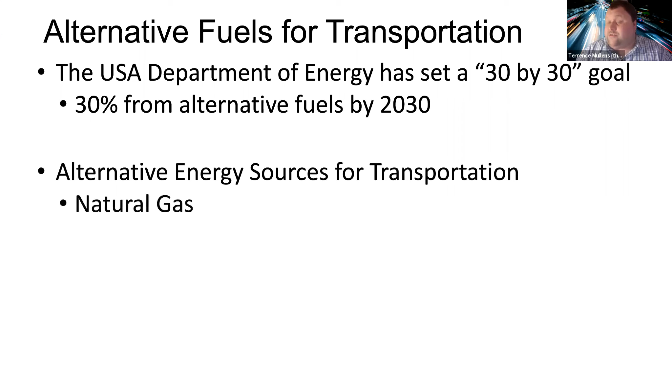Unfortunately, natural gas has that issue of fracking. Hydrogen power, believe it or not, hydrogen powered vehicles are becoming a thing now. The Toyota Mirai is a good example of that.

Electric vehicles, I can't let my friend Elon Musk down. I'm not friends with him. I kind of wish I was. I'd borrow some money from him.

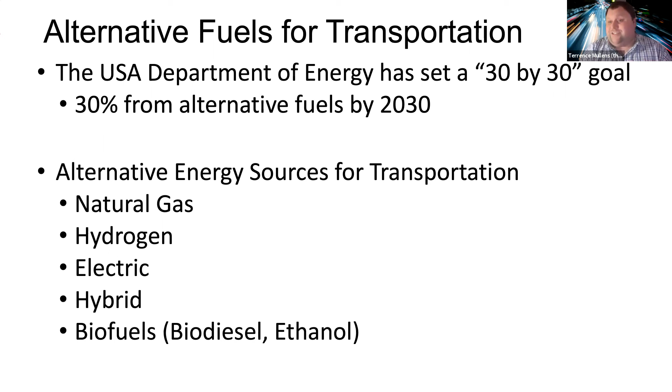Hybrid vehicles, like the one I drive. Biofuels are another potential alternative to petroleum powered vehicles, and biofuels actually have some pretty interesting implications to them. Let's briefly talk about some of these.

So many government vehicles, as well as many buses, actually run on natural gas. They'll have a little diamond on their chassis somewhere that says CNG. I think the C stands for compressed, and the NG stands for natural gas.

One of the benefits of natural gas is that it is a much cleaner burning gas than typical petroleum. Typical petroleum, in addition to carbon dioxide, shoots out a lot of other crap that we don't want, polluting our air, whereas natural gas is much cleaner burning, meaning the biggest byproduct you get is carbon dioxide.

The other benefit, as I've said before, is that burning natural gas and converting it to carbon dioxide is actually a better alternative than just letting it float away into our atmosphere, because natural gas, mostly made up of methane, has a much higher greenhouse potential, anywhere between 20 to 30 times, and depending on the time scale, even larger than that, compared to carbon dioxide.

So natural gas has been seen as an alternative. The problem, however, is that we are so reliant on natural gas for electricity generation that we've had to come up with very creative ways to get it, including fracking. And fracking has shown its share of problems.

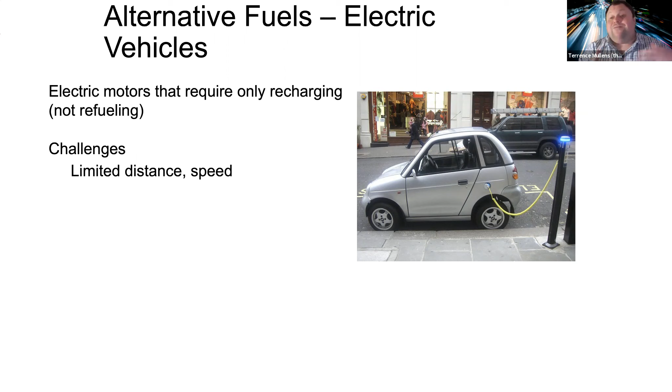And we're still at this place where recharging vehicles is not very time efficient. That's being worked on, but it's still an issue—the high recharge times. So you have to pull over and recharge, and unlike just pumping gas into your car, which takes 5 minutes, recharging may take 45 minutes, an hour, or even 2 hours. That's now time added to your trip.

Another big issue is the carbon footprint of batteries. There is a lot of emissions that go into simply mining, processing, and constructing the batteries. So this is actually another big issue. Even though maybe they use less direct energy, they use more indirect energy in the actual production of the battery.

On the other hand, there are actually some benefits. First off, they don't emit greenhouse gases directly. They don't release aerosols, so they're cleaner. They save consumer money on gasoline, since electricity is a lot cheaper than gasoline.

When you think about how much money it takes to power your home versus how much it would take to fuel your car, driving an electric vehicle would actually save you money in that area. That said, until we can get to a place where electric cars can drive farther, drive faster, and charge quicker, they're still kind of limited. And until the carbon footprint of mining the materials and producing the batteries is offset more than enough by the reduced carbon footprint of driving the thing, electric vehicles still have a little ways to go.

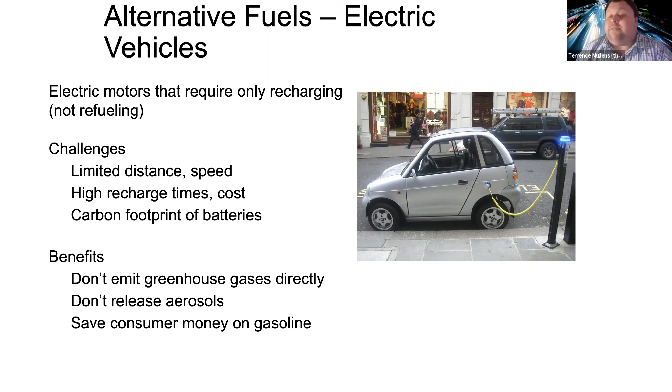Nevertheless, electric vehicles are becoming a bit more of a viable option, and pretty much every single major manufacturer does have some electric vehicles. Chevy had the Chevrolet Volt, Nissan had the Nissan Leaf, and of course we all know about Tesla. Tesla's sort of become the big motor company now. I think it's actually the most valuable car company in the entire world - don't hold me to that, but I'm pretty sure that's true, at least by stock value. So even Teslas have become a pretty viable alternative.

And then there are people like me who aren't quite ready to go with an electric vehicle, but instead really do want to stick a little bit with gas while also using some of the benefits of an electric vehicle. That is where hybrids come in. And really, the bee's knees of hybrids is the Toyota Prius. The Toyota Prius has really been the trendsetter for hybrid vehicles, and in fact, usually when people think about hybrid vehicles, they think about the Toyota Prius.

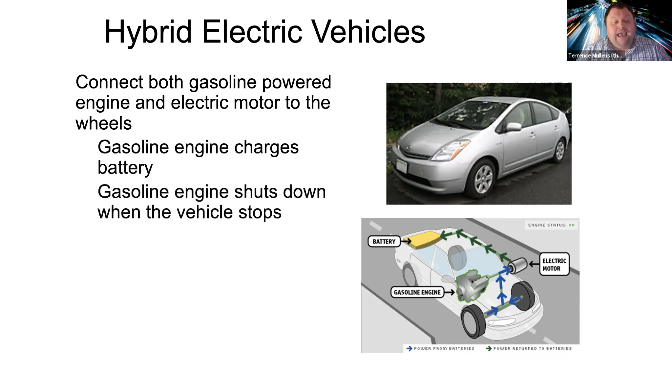Gasoline charges the battery, and when the vehicle stops or goes below a certain speed, the computer system inside the vehicle will actually turn off the gasoline engine and turn on the electric engine instead. There's also another process called regenerative braking, where as the car is slowing down and stopping, the braking mechanism also charges the battery.

Hybrids are much more fuel efficient, in some cases as high as 30% more fuel efficient than a traditional gas-powered vehicle. As I mentioned, I drive a Toyota Prius. I have driven the living heck out of that car - it just passed 160,000 miles at the making of this video, and I still get about 40 miles per gallon on it. When it was brand new, it was closer to 50 miles per gallon. So that's, to me, pretty good bang for my buck. I've been very pleased with it.

It's been having some issues with its ignition coils lately that I need to get fixed. Hopefully I can still get it on the road for another 80,000 miles, knock on wood. And then there's actually a hybrid that goes even another step further called a plug-in hybrid.

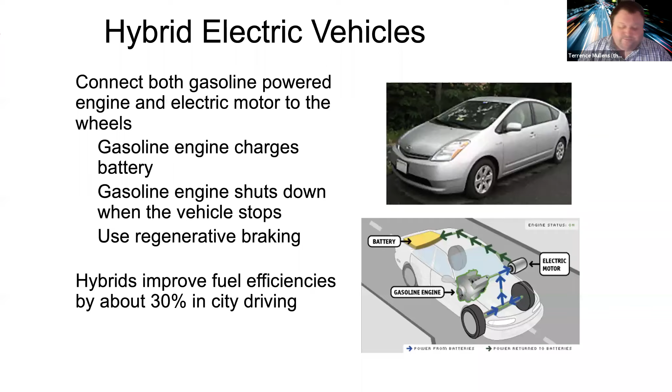Hybrid vehicles were at one time seen as very inaccessible. They were very expensive—you'd be spending $30,000 to $45,000 to buy a hybrid vehicle. But as times went on, and gas prices went up, there was a big push to make hybrid vehicles much more fuel efficient and financially attractive. As that happened, more people bought them, and we've seen a pretty big increase in the share of hybrid electric vehicles. Not only that, but hybrid electric vehicles tend to stay on the road a little longer than traditional gasoline vehicles.

Another fascinating alternative to all of this is biofuels. Believe it or not, many of the energy potentials stored in fossil fuels can also be stored in currently living things, such as you and me, flowers, trees, animals, all kinds of things. There's a lot of energy stored in us. The idea behind biofuels is, rather than tapping into energy that's been sitting underground for 5 million years, why don't we tap into energy currently present on the surface of the earth?

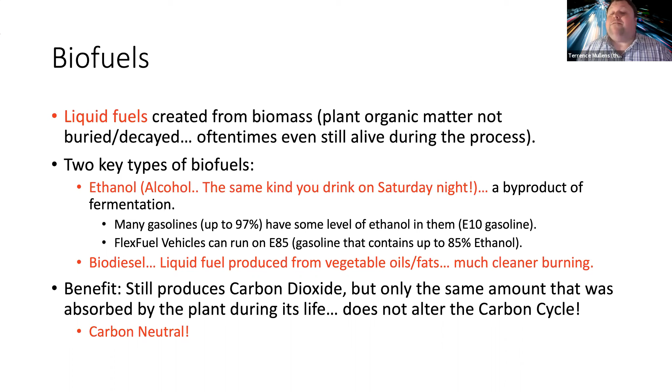And they're already on the road. We already have flex fuel vehicles, meaning they can already run on ethanol. You really don't have to change anything, or you may have to make a slight adjustment, like just flipping a switch to turn it from a gasoline powered engine to an ethanol powered engine. But other than that, it can actually be a much better alternative. In fact, there are some countries, such as Brazil, that are almost already completely ethanol based.

They're almost completely ethanol based already. There's also algae biofuels that we're looking at. There's all kinds of alternatives. So really what I'm trying to say here is that between natural gas, electric vehicles, hydrogen vehicles, hybrid vehicles, and biofuels, we really do kind of have a pick of the litter as far as what will replace gasoline in the future. Obviously, this is going to be a slow and rough transition, but it is a transition that is still worth doing.

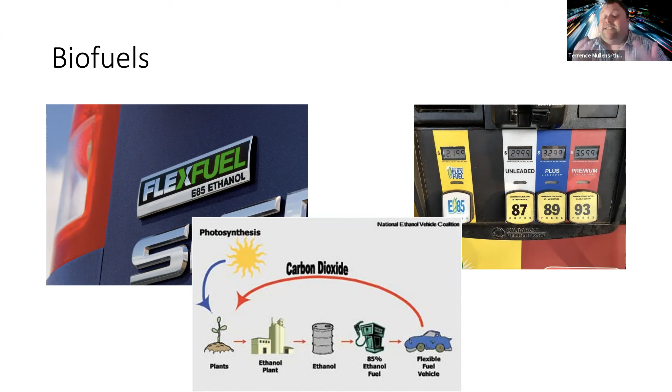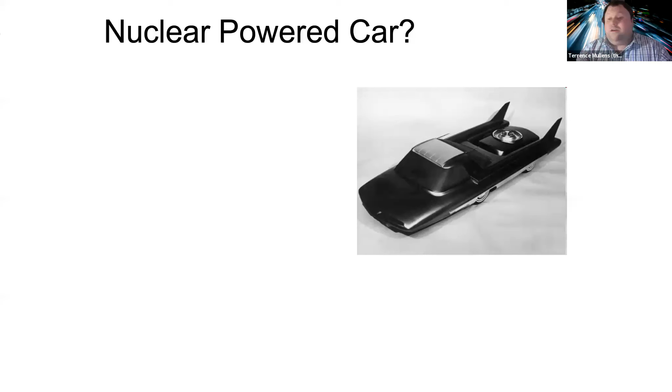Just to get a little bit more futuristic, what about a nuclear powered car? So nuclear fission actually produces a lot of energy. That energy can then be used to create steam, turning a turbine, and that creates a lot of power. Well, here's the problem though.

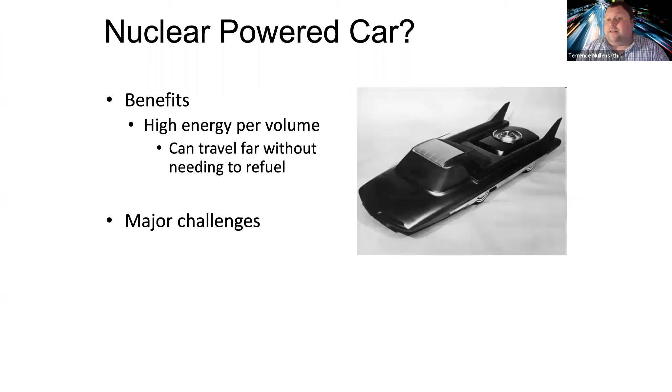So nuclear powered cars actually exist. You could have a very high energy car. It can travel far without needing to refuel, meaning that you're not having to stop at the gas pump all the time. And nuclear reactors can actually be very long lived.

Obviously, there's some pretty major challenges with this. First off, radiation exposure. And the weight that is caused by this—nuclear reactors are very heavy. Being able to scale that down into something that you could put into a car, that's problematic. And then obviously radiation exposure again—we don't want every car crash to turn into the next Chernobyl.

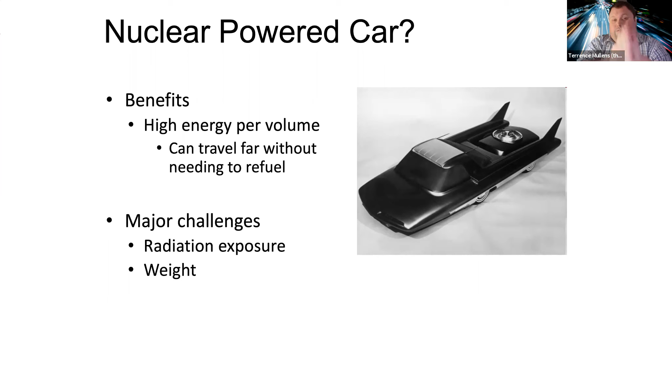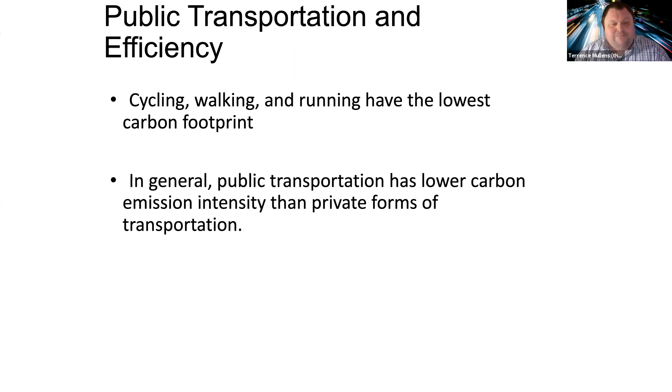And you can actually notice this, especially when you look at what's called the carbon emission intensity—things such as bicycling, walking, and running have very low carbon footprints, mostly from things like the food that fuels you to go, the carbon emissions from your shoes, and so on. Very minuscule, very minor carbon footprints.

However, city transit, buses, and so on are much more fuel efficient. They have much less carbon emission intensity compared to cars and trucks. And one of the biggest negatives of this is that here in the United States, we are kind of behind the times in terms of our fuel efficiency for these different public transits. But really, overall, taking public transit is much more fuel efficient than taking a personal vehicle.